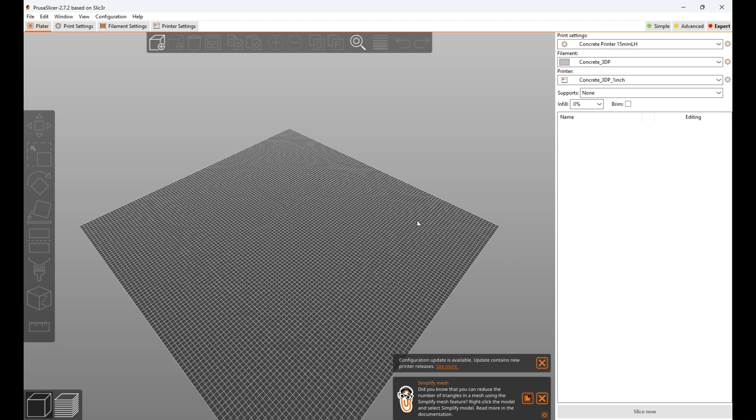Okay, so we're here in Prusa Slicer. We're about to create some G code that would be appropriate for our concrete mixer. So I've created various print settings, filament settings, and printer settings that would be appropriate.

If you look at the print settings, you can see we've got one called concrete printer. If you edit that, the layer height is set to about 1.5 centimeters, and the first layer height we'll make a little lower, about 10 millimeters. The rest we don't have to worry about. We're not doing any infill, skirt, or brims on this either, so we'll keep those as is.

For the filament settings, it's going to be a 10 millimeter filament, I suppose, but it doesn't really matter since we're extruding concrete in this case. In the printer settings, we're going to make the bed quite large, about 1,000 millimeters by 1,000 millimeters, or about a meter by a meter, enough to hold our big pots. We're going to make the maximum height about 1.2 meters, so we have a huge bed volume, which is great.

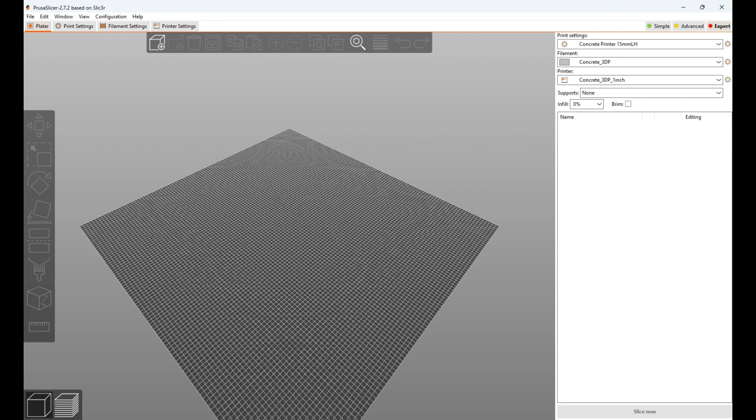Now we're going to go over here, and I've created three little pots. I'm going to start with a cylindrical pot, which we'll drag on over. There's a nice cylindrical planter pot we'd like to print, and we have the concrete printer settings all in place, ready to go. So let's just slice that and see what we get.

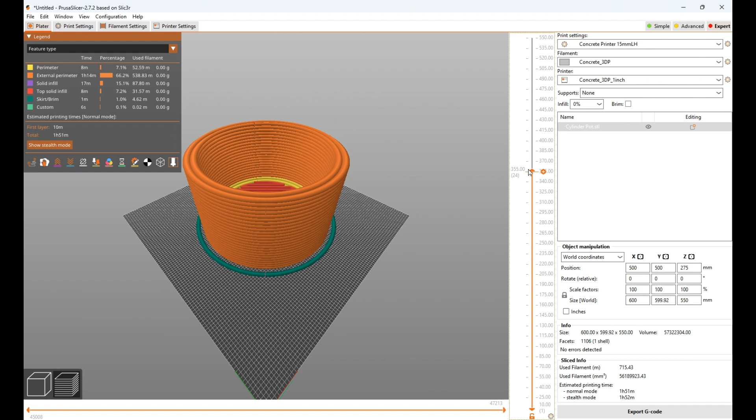All right, looks like we got a very bold print right here. Nice thick lines, and the base looks ready to go too. So I think our cylindrical pot looks great. Let's export that G code and save it as cylinder pot G code. Tuck that away. Now we can just delete this one.

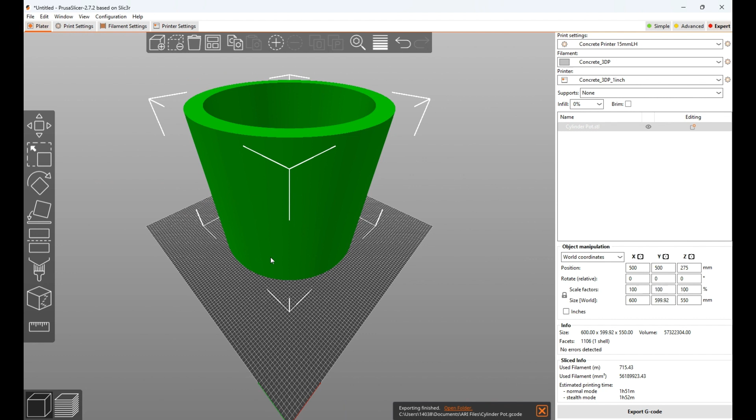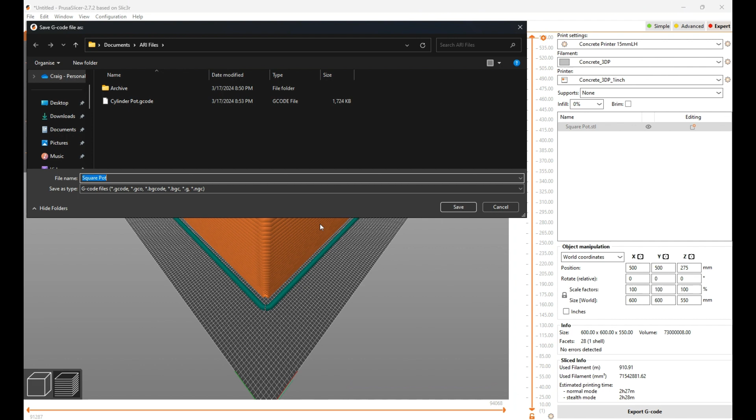I'm going to go back to my files, and we're going to put in the square pot. Okay, there's a beautiful square pot. We're going to slice that one too and check it out. That looks very nice, beautifully sliced. So we're going to export that G code, call it square pot, and save that away. I'll go back to the model and delete that again.

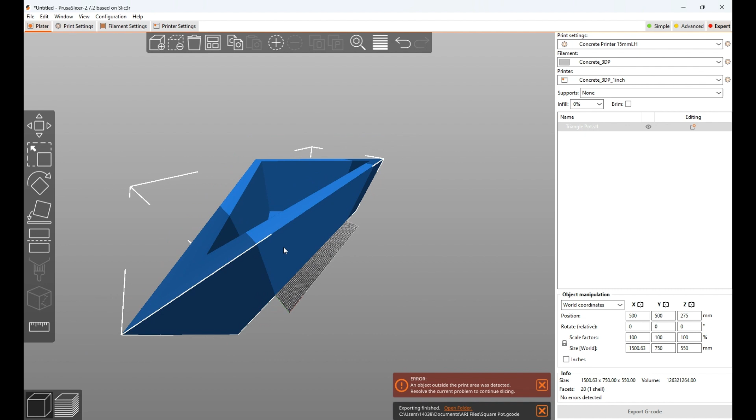Now let's get the last custom pot, built in Fusion. There's the triangular pot. Now, the triangular pot looks like it's going to be a little too large, so we don't want to use it as is. Let's see if we can resize it so it fits on our platter. Yeah, it looks good, it's going to be a fine pot. So we'll slice that one now and check it out. Very nice. We'll export this G code and save that.

And now if we look at our files, we can see we have the cylinder pot, the square pot, and the triangle pot G code all loaded up and ready for us to 3D print.

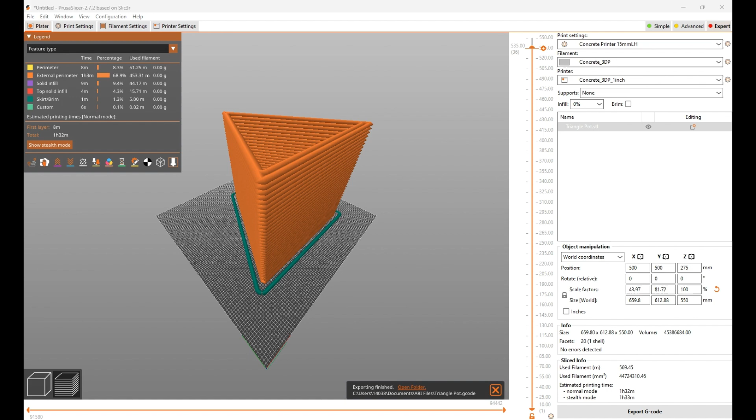All right, I just wanted to go through the process of setting up your system and printing out a few different kinds of pots that I've created earlier in Fusion 360, and then sliced up in Prusa Slicer in the previous little talk.

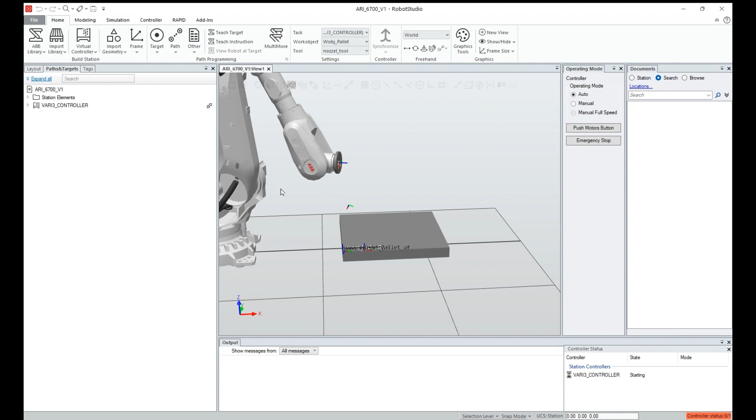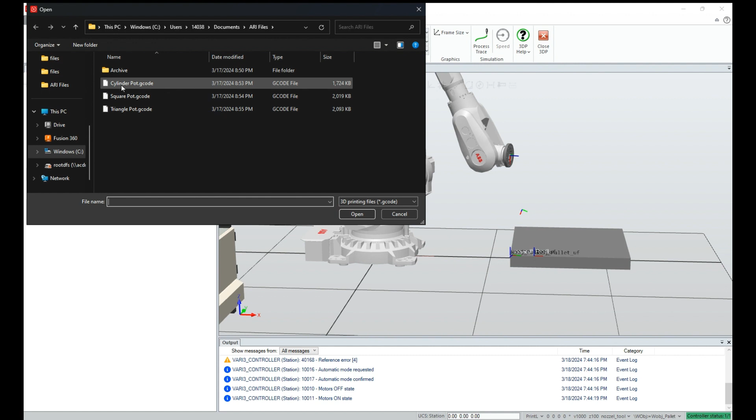3D printing app, and we're going to start. We're going to go generate the G code. So let's just choose a pot for our first sample.

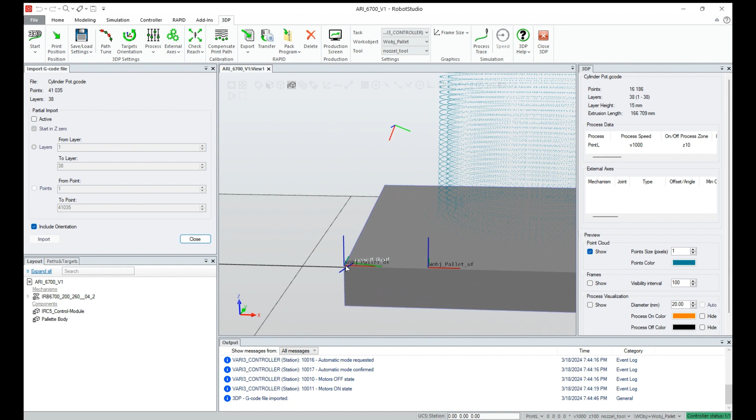So we've inputted the pot, and if we can't see it here, we're going to have to import it already. So let's go ahead and press import. Okay, and the pot looks like it's in a great spot. The work object frame is right. I don't think we're going to have to change that at all.

So let's go ahead now. We don't have to worry about the print position because it seems pretty good. Path tune, again, I think I'm going to make it just the default. Targets orientation, we'll choose aligned with robot because that's going to make it much easier to set up.

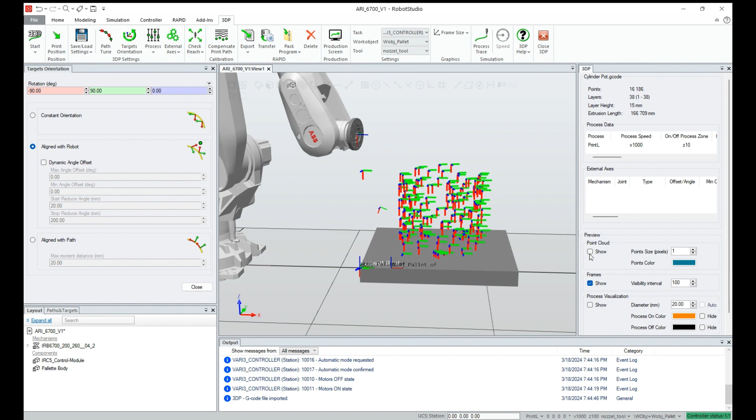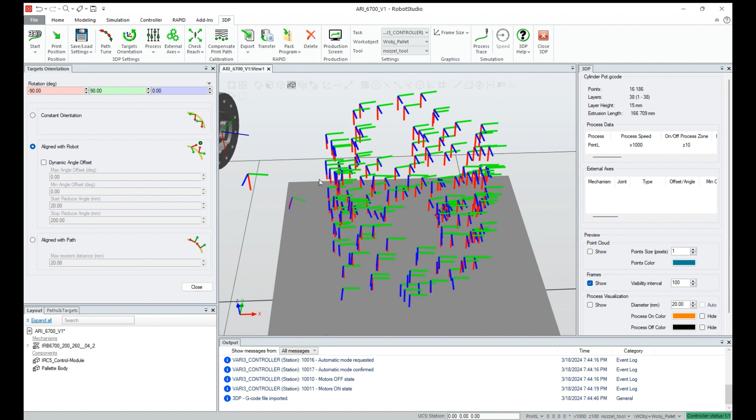And if I look at the target here, this is the tool center point for our extruder, and they line up quite nicely with all the targets on our pots. So I'm really happy that they're going to have no problem lining up. If they do have a problem at this point, we would rotate, making changes to the rotation of all the targets to try to make them line up. But I don't think we'll have to in this case.

Next, we'll check reach. We've got a few configurations here. This one's got a very large angle on it, so I'll try to avoid that one. This one's got a large angle too. And this last one here, all the angles look quite good, so we'll just apply that.

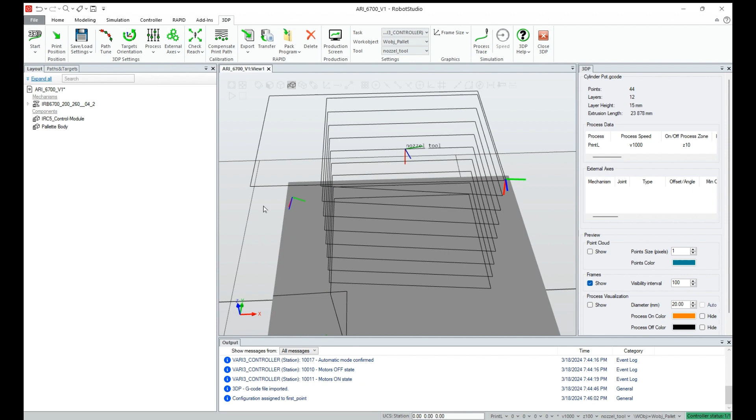And the robot went through all those motions and felt that there's no problems at all. It was able to reach all the spots. So we were good.

All right, so now that we have the targets set up and we can check the reach, we're not doing external axes yet. And for the process, we'll choose the externally controlled extrusion with an optimal cycle time, which means it's going to print it as quickly as it optimally can. We should be all right.

So now at this point, we're going to go export. We're going to export it to Rapid, and we're going to call it pot, and then I'll put the date behind that, March 18th. And this is the cylinder pot. So we'll just export that.

So now let's go to Rapid, and we'll synchronize everything, and hopefully we'll be ready to go.

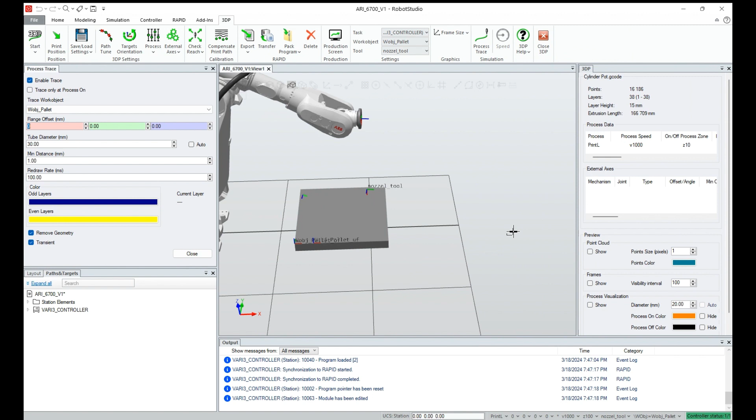So I'm going to go back to my 3DP, and we'll turn on process trace. We'll enable the trace so we can see our pot forming. And we'll go ahead and set the program pointer to main, and all tasks. There we go.

If I go back to Rapid and check out the Rapid code, there's my Rob1 main 3DP, and the program pointer is right there. And we have a couple of these move absolute joints. This moves the robot to a certain joint position, but doesn't worry about any paths or anything to get there. It just moves the joints to those positions.

This is useful if we want to move through complicated motions where the robot may twist itself past an axis or perhaps reach a singularity. These are usually what we get away from. But that being said, this might not be the position we actually need for our robot to be in. This is the actual position it's going to reach into.

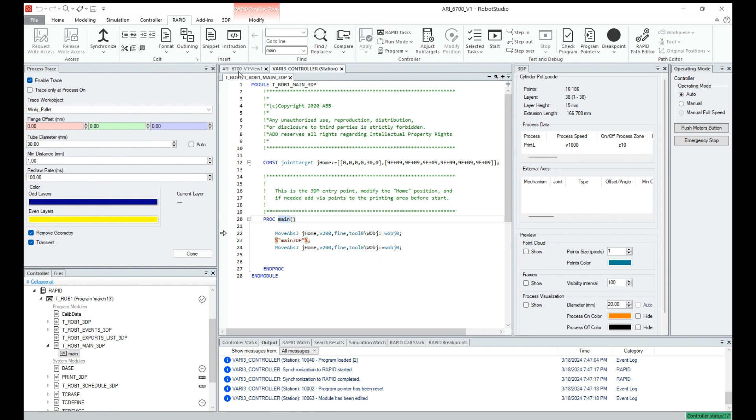Now we're going to try it, and let's see if it actually works. So we're going to click on here. No guarantees at this point. Press play.

And right now the robot's processing all of the layers. In a moment, it's going to reach down again, and we're going to see if it can do it without any uncomfortable postures. So just wait here for a moment more.

Okay, now she's going in, and it starts to print.

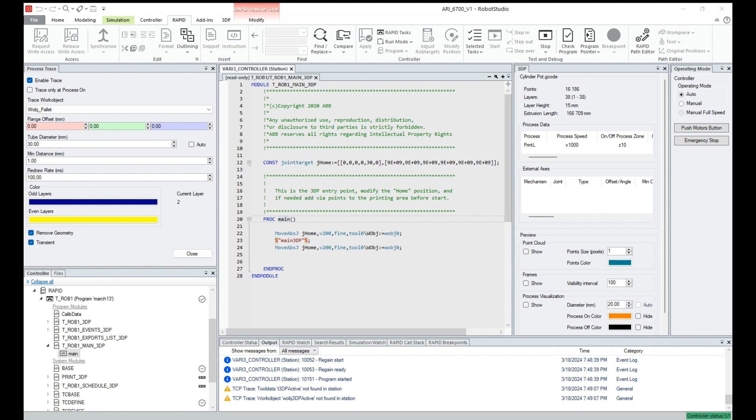So I can go to 3DP, and maybe we'll speed that up a little bit so it's a bit faster. And while it's printing, let me just show you a few things.

So these are all the station elements on here. This is the default task. Here is all of our tool data, the nozzle tools held right in here. This is our work objects. There are work objects, the joint targets for when it initialized. There is the work object pallet, which we can see right down there that it's actually printing on. That's the work object pallet.

And these are all the paths that were created by the 3DP program. There's the main entry point right here, where it does the two moves. There's the main 3DP program. And these are the post layer events, so this is what happens after a layer is printed. Anything in here happens before, and so on and so forth. So these are all the paths and targets.

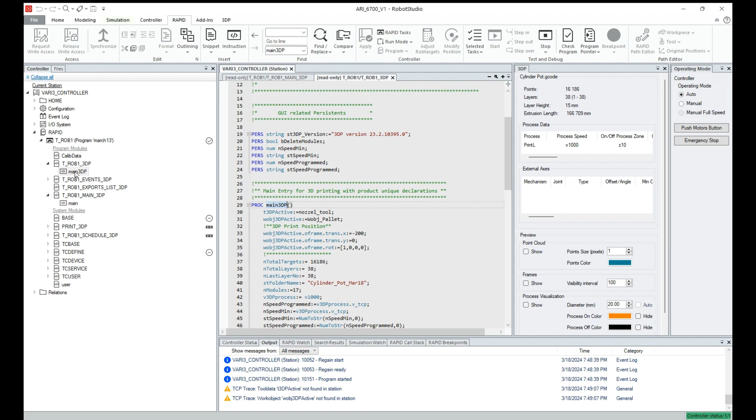Now, if we go to Rapid, we can actually see the true code. So here, this is the TROB1, the main 3DP. You can see this is the actual program running. And if we had any issues with these instructions, that would be the problem with the license for the 3DP.

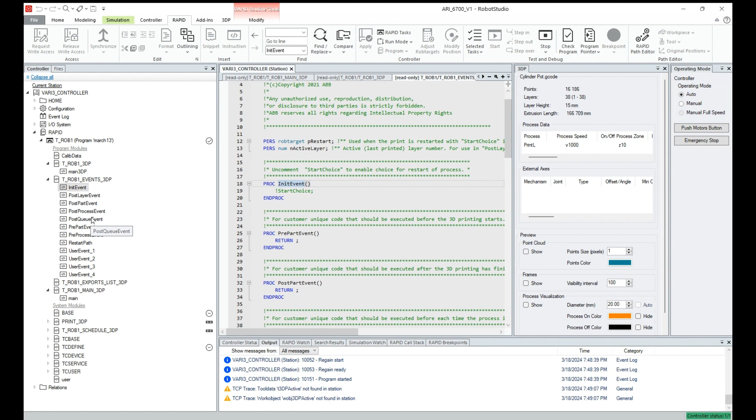These are all the events. So the init events, this is what's going to happen during initialization. There's the post part event and the pre-part event, which happens before you print the part, and what you do after you print the part. And this is the post queue event and all those kind of things. So if you have to do anything between the different layers, you can just put your instructions into these areas and it would do them.

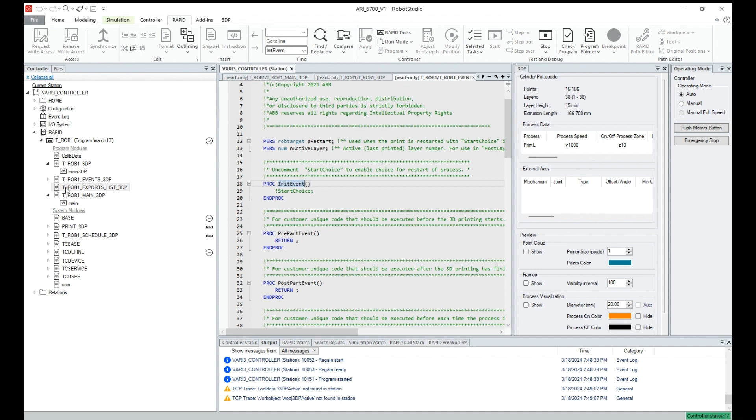Okay, this is the robot export list. You can see all the robots, all the parts that we've been printing all show up right here on this list.

And this is the main 3DP program that you can see that calls the 3D print routine. So now you can see the part's been finished and has disappeared. So that looks like it's ready to go.

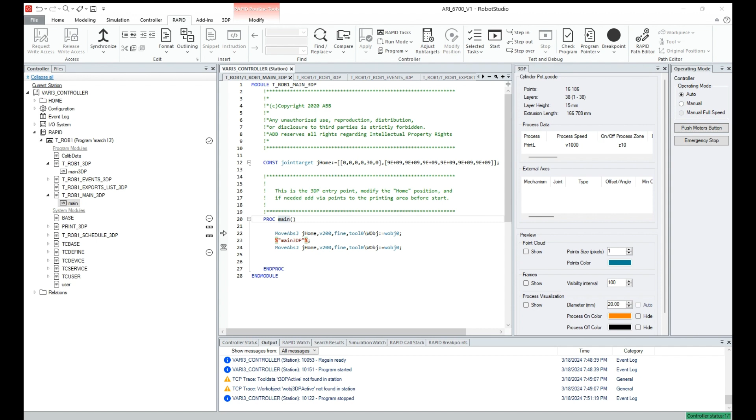So now at this point, you would go back to your controller and you would create a relation between the virtual robot and your real robot. Then you would copy from the virtual to the real robot all of the files, and then you should be able to run it on the real robot at that point.